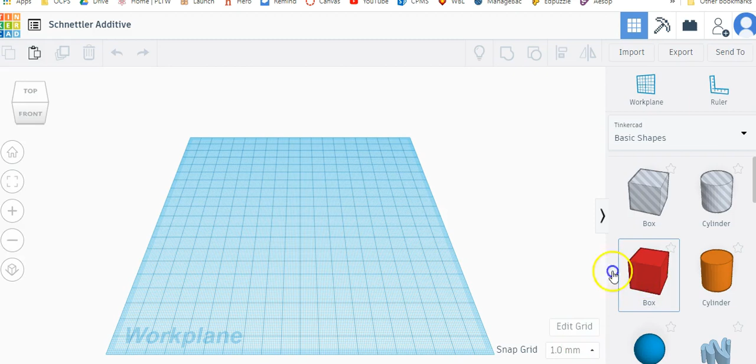There's a couple other things I can do to make this easier on myself, now that I've done the tutorials and practiced using Tinkercad. One is, you'll notice there are measurements for your box. Once you pull it in, you have the inspector window, and length, width, and height are already set to 20 millimeters. So this box is actually already exactly the shape you want.

Again, if you want to be a little extra, you can try to make it exactly 19 millimeters in each direction just by clicking and typing. But for this project, I'm absolutely okay with us just using the standard block as it comes.

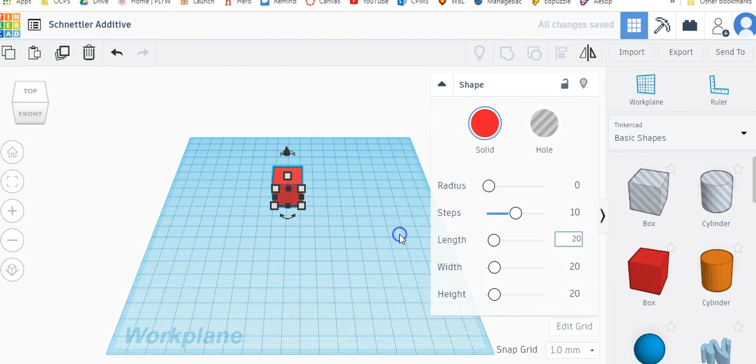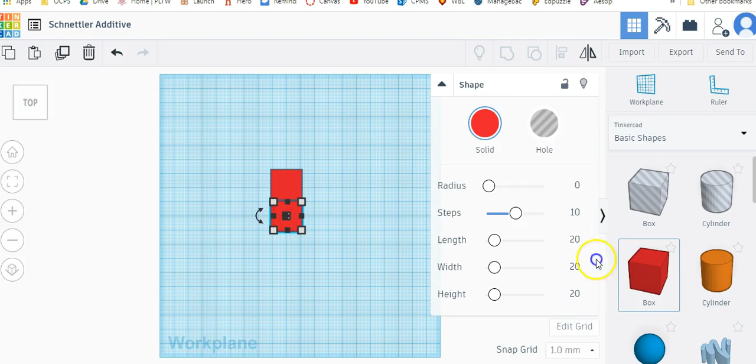Another thing I can do is tilt the work plane so it looks more like my isometric picture here. I can also use my multi-view to understand where the blocks should go. This is my top-down view, so I can go to my top view and add blocks according to that view.

Oh, this one's overlapped a little bit. So I have this shape, and then the block in the back is the tall one.

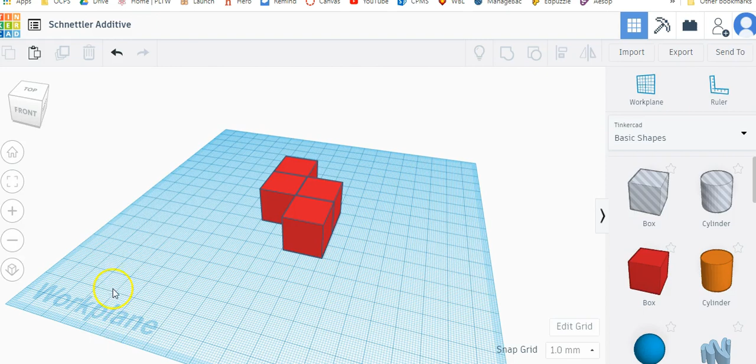Again, I'm going to use a little cone to raise it up higher. I want to raise it up 20. I can see how high it's being raised there by the numbers. And then I can move it, grab all of my shapes.

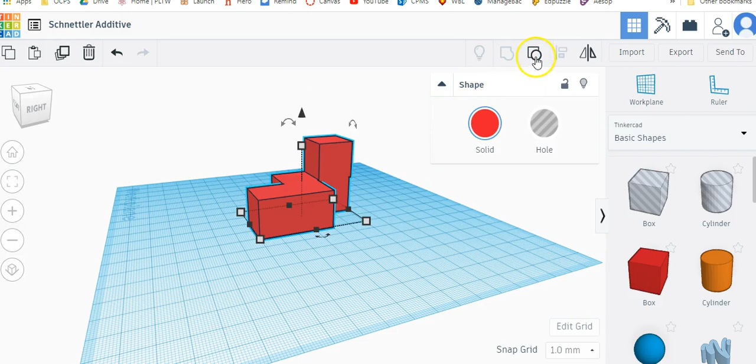I can see that's off a little bit, so I can fix it by ungrouping them, zooming in, and grabbing this one shape. Let me back up just a little bit. There we go. I can also select just these two cubes in the back and use the align button, to make sure that they're aligning correctly.

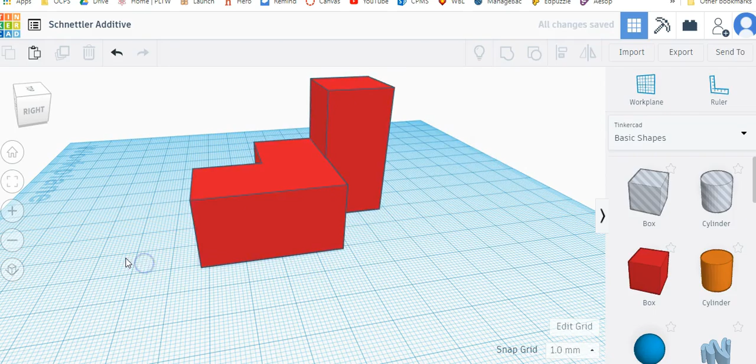And that's it. We're done with the additive.

So what you would do now is take a screenshot of this, which will be a little different depending on what program you have. But you should have either Snipping Tool or Snip and Sketch, which we've done before in class. You just draw a square. With Snipping Tool, all you need to do is right click and hit copy. With Snip and Sketch, there's actually an icon up there that you have to click — you can't just right click and copy. Then you put that right in your Google document and get ready to do your subtractive.

I hope you found this helpful.